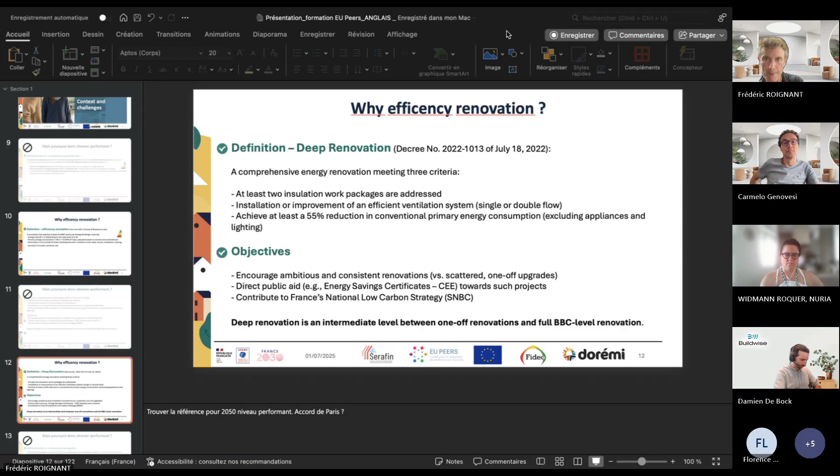Frédéric? Yes, just one question. We are still on slide number 2 on the screen. Is it normal? No. Is there any change now? No. Okay. Now it has changed. I try to share the document again with you. Now we are on slide number 12. I got a problem. Yes, number 12 is okay. I think you are not sharing the right window. Sorry. Is it better like this? We still see slide number 12. And now, do you see number 14? No? Okay, so the problem still remains. I think if you stay on the PowerPoint window, you might change the slide manually and we should follow it. Yeah, like this is better. This is number 12. And now this is number 14. Okay. Good. Thank you.

Thank you, everybody. So I was telling that there is a second definition, which I call deep renovation, which is a little bit different from the first one. Here you will see we just have two insulation works, whereas in the first one we have more. It's the question of ventilation system. Here you have the choice between single or double flow, and we have a criterion of improvement of the reduction rate for conventional primary energy, which is a little lower than the first definition objectives.

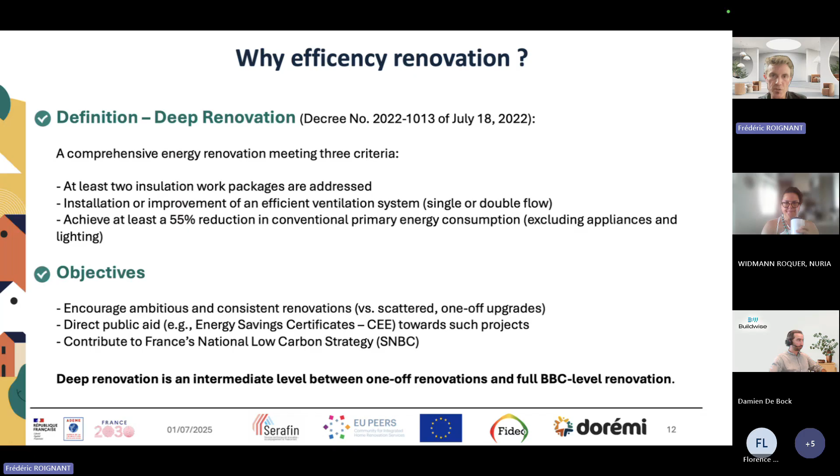Okay. So on slide 14, you have the definition of the one-off renovation, which is the largest gesture work done for the moment in France. For example, it's just changing windows or insulating or replacing a boiler, but without a global reflection on the work we have to do to reach very high efficiency.

For Doremi, we are not very pleased with this definition because we have a contribution with ADEME, a French institution, in 2020, which shows that 80% of one-off renovations are not capable of improving the DPE, which is the scale of evaluation, by more than one level, and only 5% reach the BBC level or equivalent.

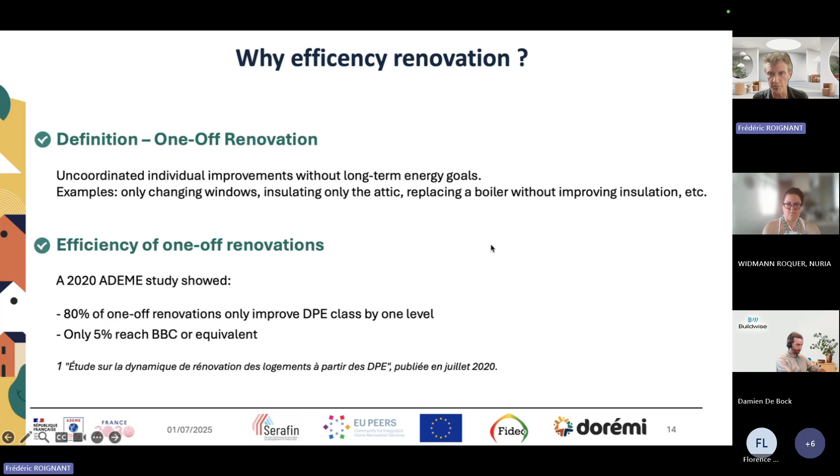Okay, so at the end of the day, we see that one-off renovation work is not the one which has to be continued or supported to reach the climate level in 2050.

Okay, so why do we talk about efficiency in renovation? As you can feel today, it is because we are facing global climate change. But more than that, we have seen that we will face social goals also. We have a big amount of people in energy poverty in France, and working to improve efficiency in renovation will create local and non-relocatable jobs here in France and in every country,

supporting territory development. Okay, so besides the climate goals, we also have social and economic goals, and surveys show that we can expect about 8 million energy... Sorry.

Okay, I'm lost in my slides. Sorry.

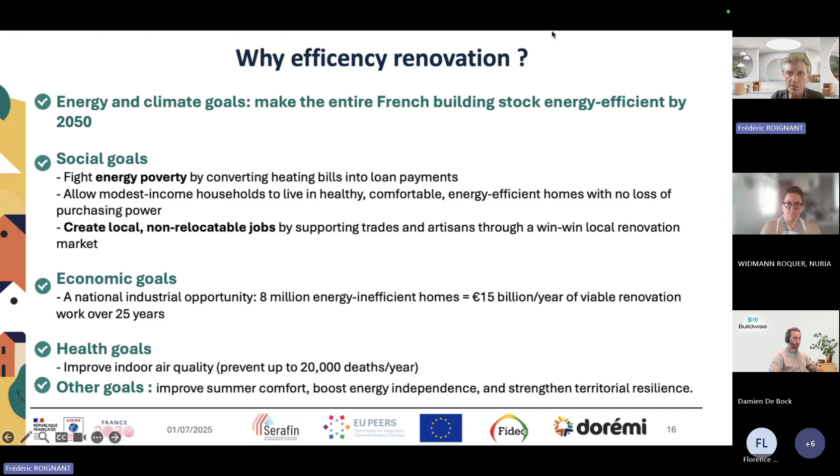Yes. Okay. The word is we have an opportunity for economic industrial development, and you've got figures for the 25 coming years. And also there is a point: health goals. Because we know that we've got poor air quality in homes today. Okay, so this is the major point because we are dealing with efficiency renovation today.

For Doremi, the word is we want efficiency renovation to be accessible for all people when it's well planned, optimized, and well managed. Okay, it is not just for people with good revenue. So we need to regard financial planning and project coordination to ensure that we will succeed in this work. So for us, efficiency in renovation is you get good health quality in the home, you have comfort, and you consume very little energy.

Okay, so now chapter 2. It's not sufficient just to talk about energy in a renovated home, but we want to be sure that the energy performance is real when the work is done. Okay, so we will see how we are organized in Doremi to achieve this goal.

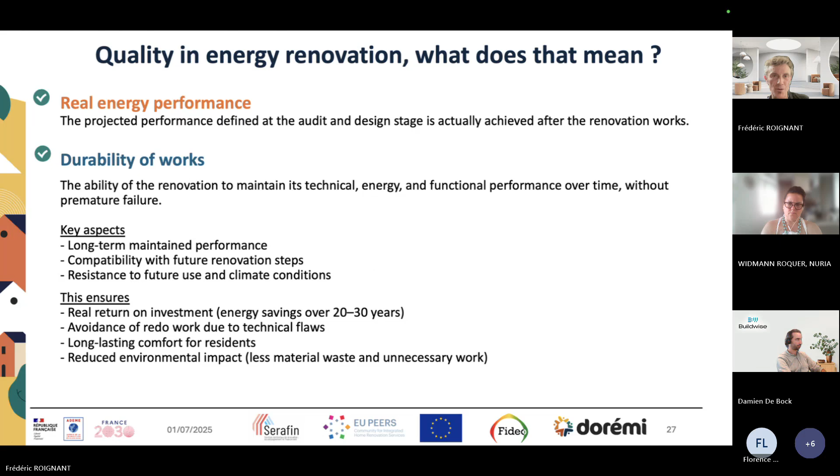Sorry, there is a title in French. This is what quality in renovation is. So for the user, it means first of all comfort and a healthy residence. We know that 30% of people talk about difficulties during cold winter to be okay in their home. And we see there's an increase, because in 2020 the figure was just 14%.

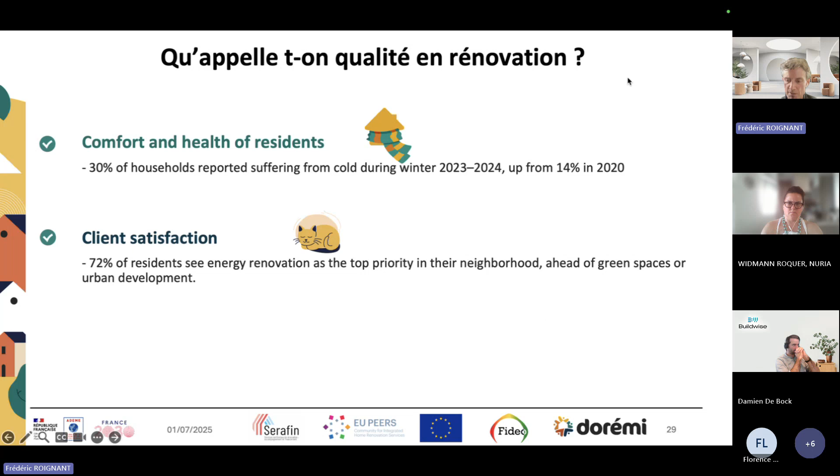Another point is satisfaction from the point of view of the user. For them, this is the first priority, coming largely before other aspects like green space or urban development. So this is a very important point. Next one.

So let me talk about DOREMI in a few words, for you to understand how we are organized. We are part of a larger group, the Negawatt group. We were born in 2017. We come from the Negawatt Institute, a kind of think tank thinking about transition from a global point of view for France, energy and environment, and changing society's way of thinking. DOREMI has been created to face the demand for renovation of essentially old houses. We are independent, but we are also funded by great companies like Schneider or Edilians.

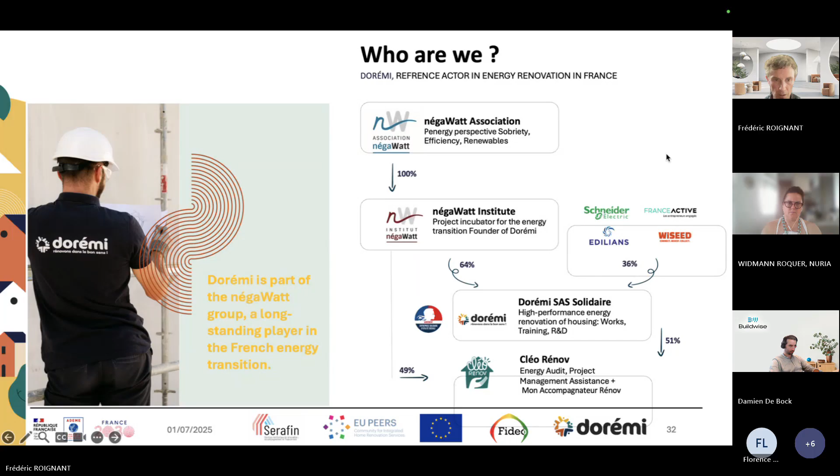Next. The strength of DOREMI is we are organized in 3 major parts. Here I am talking for DOREMI formation, which is training, one of the 3 pillars of our organization. We also have the lab, the people thinking about and dealing with research themes with partners, French and European. And we also have DOREMI work, the field way of doing high quality renovation.

So we are working all together day by day, and this is the strength, because the innovation put forward by the lab is trained to craftsman groups and finally leads to a good renovation project on the field. This framework is very particular, and I'm not sure there are lots of companies organized like this in France.

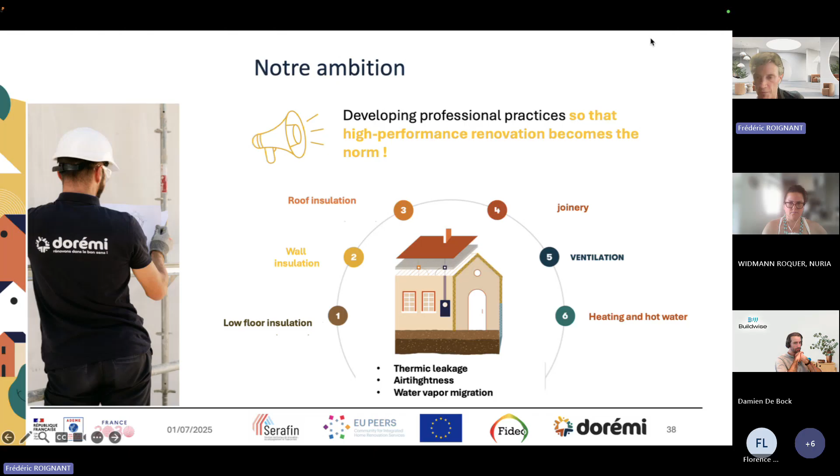Okay, and this is very specific because this way of thinking the renovation is not very shared by lots of people here in the field, in reality. Okay, so let's go deeper in how we are organized to do that. Let's talk about pillars of quality. It's like many proofs of quality. So let me explain one of them.

Based on this scheme, we can reach high performance energy renovation in 2 ways. The first one, and the major one up to this time, is the project in one step. Okay. It means we will find fundings, technical solutions, and without any blocking from households. Okay, these are the 3 conditions which make it possible to do high performance renovation in one step.

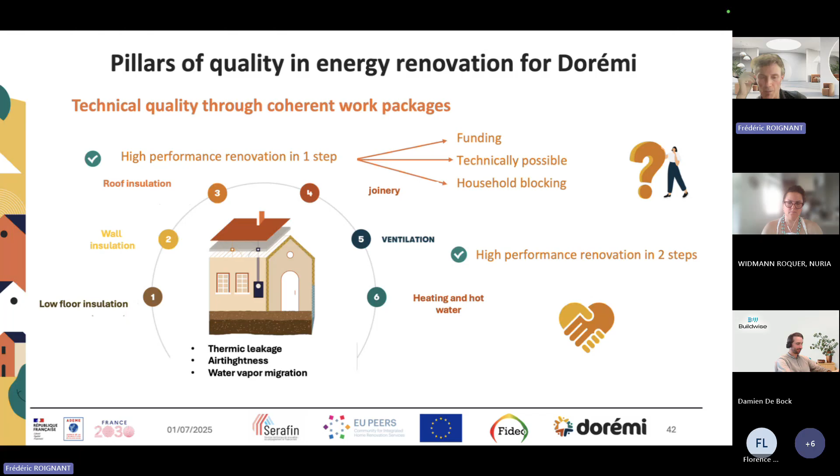Okay. There are some French inside. So I don't know why.

Another goal is to ensure our partners that Doremi is still engaged in high quality renovating and not just going to say, okay, it's not important, let's do 3 or more steps and we will see what's going on. No, it's not okay for us. So at the end this study showed that it's possible to do it in 2 steps. Okay.

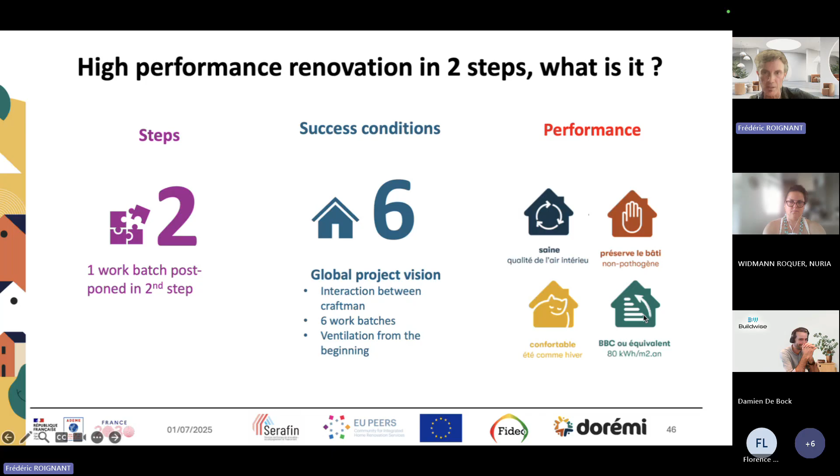So if we want to sum up the conditions to have performance in work in 2 steps, we will say that we have the 6-pack of work plus the interaction between craftsmen, which is very important to ensure quality. And we know that we have to treat the ventilation from the beginning because with its network, it's more difficult to do the work at the second step. And if we have these conditions, we know that we can reach the same performance as if we do the work in 1 step. Okay.

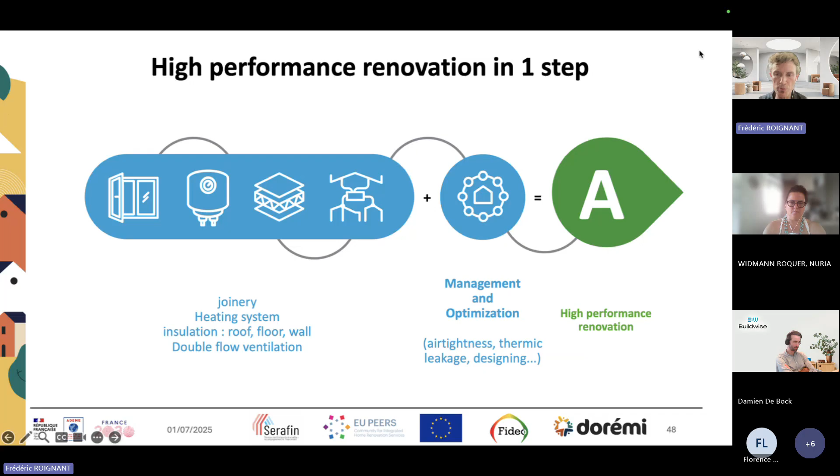So another scheme. So the conditions to get high renovation performance in 1 step are these ones. So this type of work: joinery, heating system, insulation, double flow, and 3 more things: air tightness, thermic leakage, and designing.

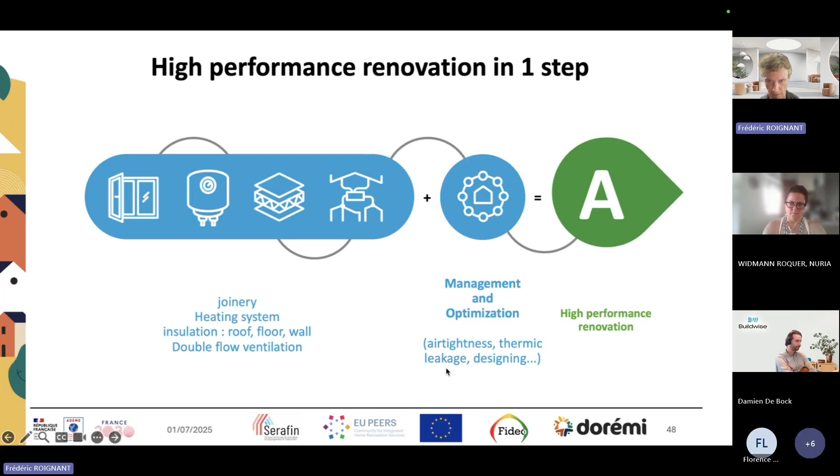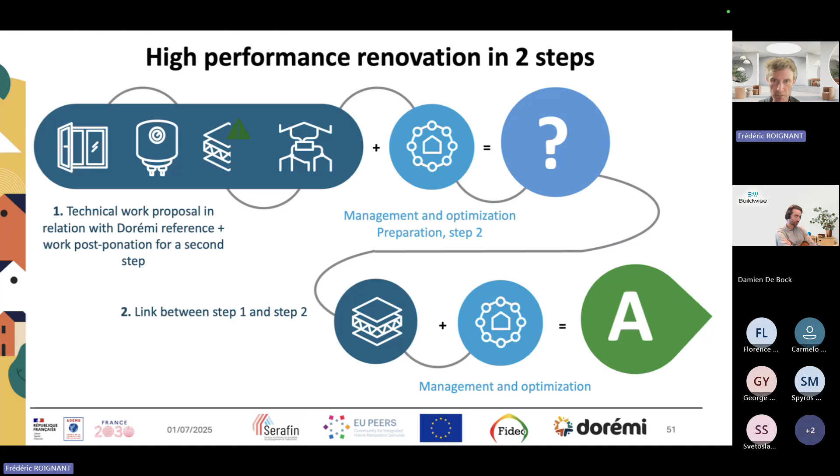And if we want to do the work in 2 steps, we'll go with some work. And after we have to optimize and make it possible to do the complementary job in step 2. But we have to deal with it and design it from the very beginning of the project. Okay. So it's more complicated, but it's possible to have the same result at the end. Okay.

Do you have any question at this stage? Do you need to make a little pause or something?

Okay, so if it's okay for everybody, let's go on with another point of quality for Doremi. The thing is, if we want to have quality, we have to have a look at the global landscape of performance actors. And to ensure we have good actors, we decided to train them from the beginning. So we designed a training program for enterprises, while generally it's more like craftsmen groups of 2 types of small enterprise. And the goals are to make them progress on professional practice and also create the conditions to work together and to be okay with the global methodology of Doremi.

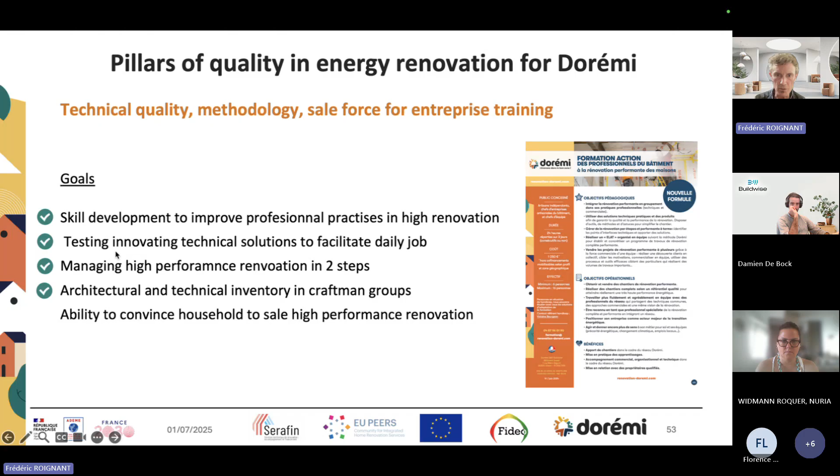Okay. So this is a very short program, just 3 days, like a more academic training program here in Valence or in regions. And after, there are some experts who are close to them for about 1 to 3 work projects on the field. And we have also the same kind of training program, but for experts who are going with them during the beginning of the collaboration with the craftsmen. We know experts, but they are also trainers.

So this one is a 4-week program. We talk about training, teaching postures, how they have to face the craftsmen, the household, and we talk about the way of teaching and the way of managing a group of craftsmen, and sometimes it's not very easy. Okay, and obviously we talk also about technical expertise, sales, and organization.

Okay, so this is another point. We talk about training for enterprise. For teacher, they go with craftsmen, but we also have an organization for household because they want to have someone to talk with during the project from the beginning to the end. So we have a commercial offer which takes them from the very beginning, the first contact by phone, to the reception of work, usually about 10 months or more of collaboration.

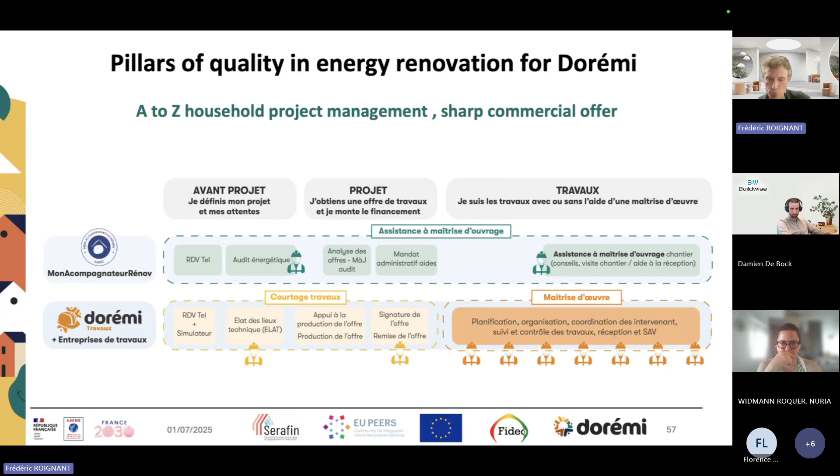Then after, the trainer goes with the craftsman group to design a technical and financial estimation for the work. Then after that, once the project is signed, the craftsman group makes the work together, but they are guided by the trainer and the expert from Dorémi.

Before the end of the work, we have a very important stage, which we call the N50 test. It is the way to show that the airtightness is good or not, and it is the time we discuss if we need complementary work to reach the expected quality. Finally, the last step is the reception of the work by the whole craftsman group and the trainer.

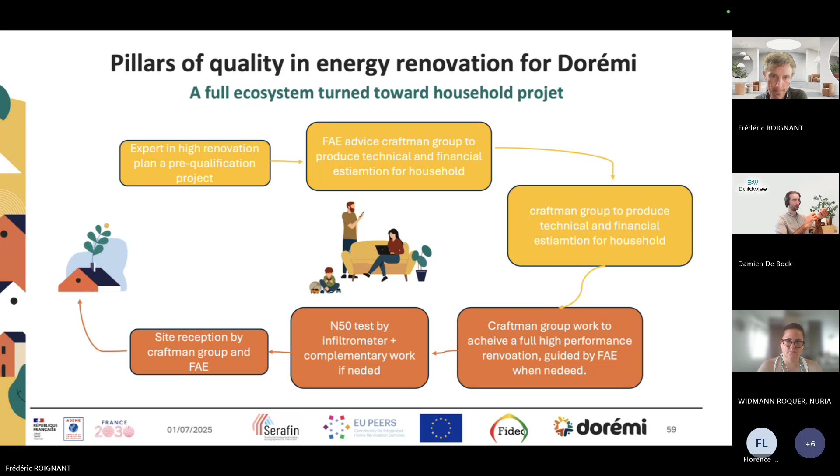Okay, so this slide is just to show you the major steps for the renovation project from the point of view of the user, the household. More or less it has the same meaning as the coming slide, so I'm going to be very fast on this one.

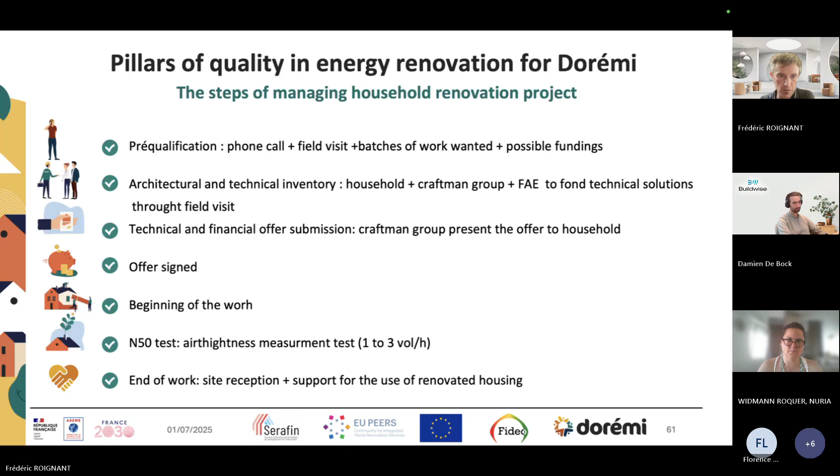And now I'm going to present another tool at the service of quality for the benefit of the household. It is the internal reference grid, we call it référentiel Dorémi, for high quality performance. So this is the first page of this document, and what is inside?

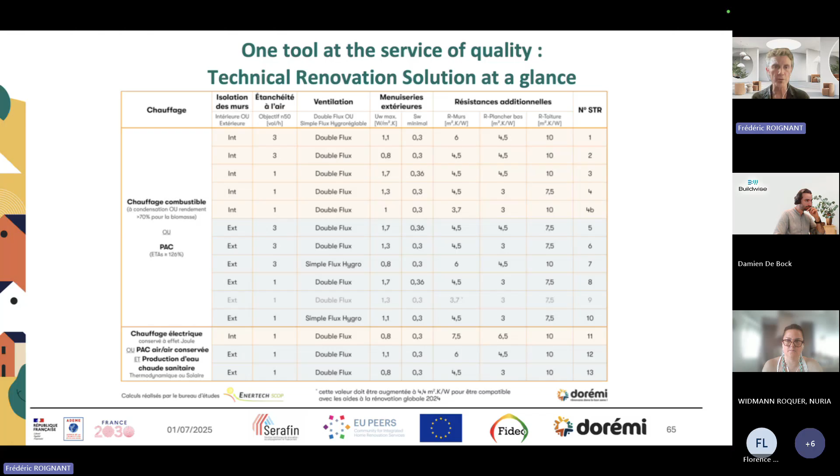Then when you go along, you just have to follow the line, and after you reach a number of solutions, which is a pre-thought way of designing the project. So we don't need to do any long thermic study for this particular project. We know that in this kind of condition, we can reach a BBC level, a low consumption for houses, just by following this grid, more or less. So it's a way to stay simple in the way of engaging work, and this is also very useful to talk with the household.

Okay, so another major point for me is that quality is not just designed on paper, but the quality is made also because we are present at each stage of the project. So these stages are: before the craftsman group makes the proposal to the household, we have control. Before the engagement of the household, we have a control. During the work, we have control, and one of them is the N50 airtightness test. And we also have control many times during the work.

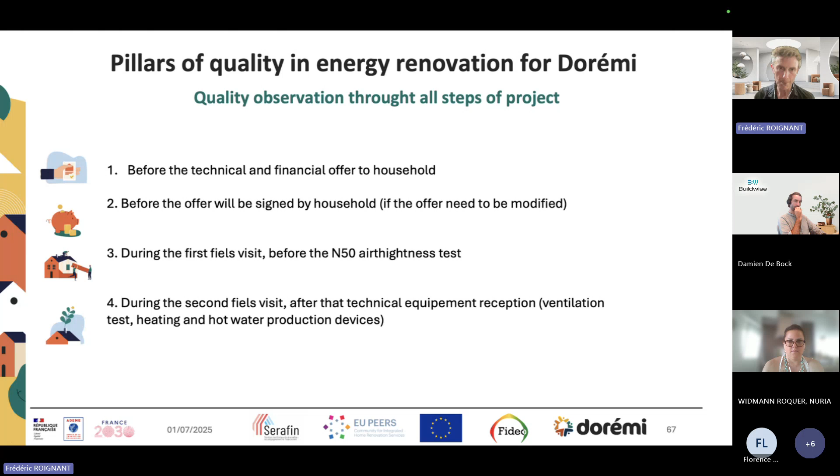And just to show you a tool we use to make the control, we developed this grid directly linked with the référentiel Dorémi for high performance. And the experts follow this grid at each step of the control, and they make control iteratively, times to times. So they have the capability, the ability to show the progress on the work of the craftsmen.

We also got an intern software to follow up the project. As you know, we are spread across 5 regions in France, so we have numerous projects at the same time. We need to be very organized to know what's happening, who the projects are, and where they are, to make adjustments if needed. This software, called l'Appli, is just an internal software, but I want to show you how we are organized.

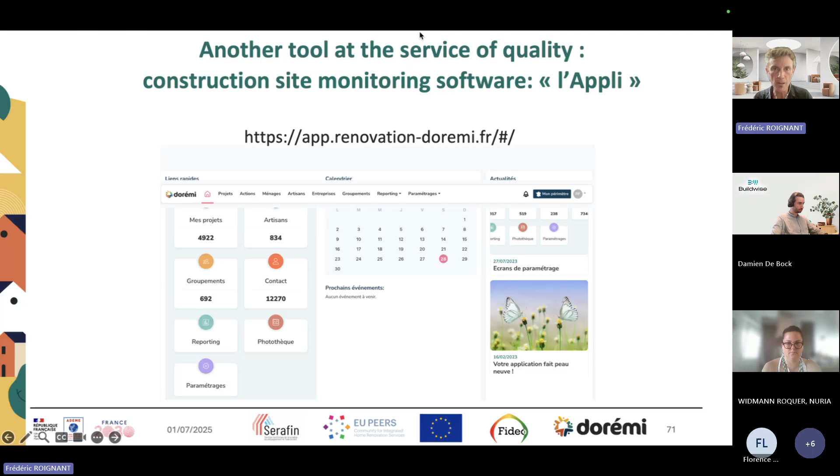Okay, I have to just, sorry. I'm going to make a jump to this software if it's possible, and I'll share it with you just after. Okay, where is it? Tick-tack, tick-tack, here. Okay, just a few moments please. Okay, so it doesn't work. Okay, no.

Okay, here we are. Let's try, I'm not very good with sharing documents. Do we see something different than before? Yes, no? Yes, it's perfect.

Okay, thank you. So here you've got the projects. I'm not going into detail, just a quick overview of the software. This is the list of projects we are dealing with at the moment. I'm choosing this one, so you can see an organization.

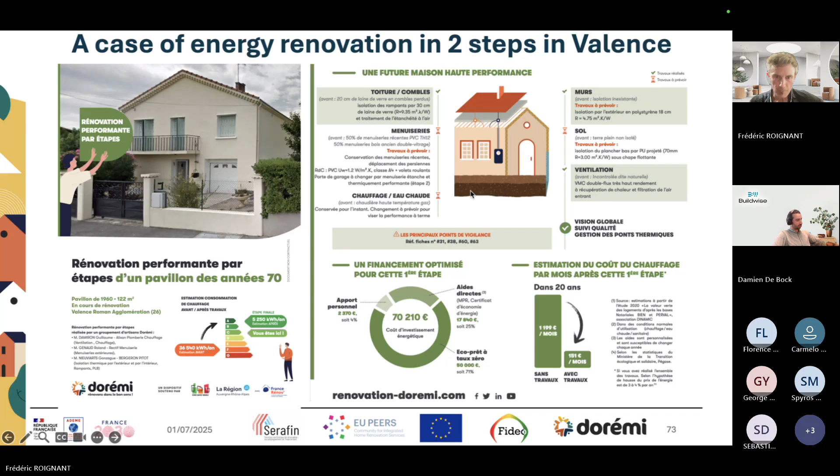And here you've got the detail of the type of work designed - the first step in black, and the second step in red. So this is a case where it was not possible to do the renovation work in one step.

This is a document that is discussed with the household, and if needed, there are references here in red and black to a technical guide they can refer to if they need to go deeper in understanding the technical work they are going to have.

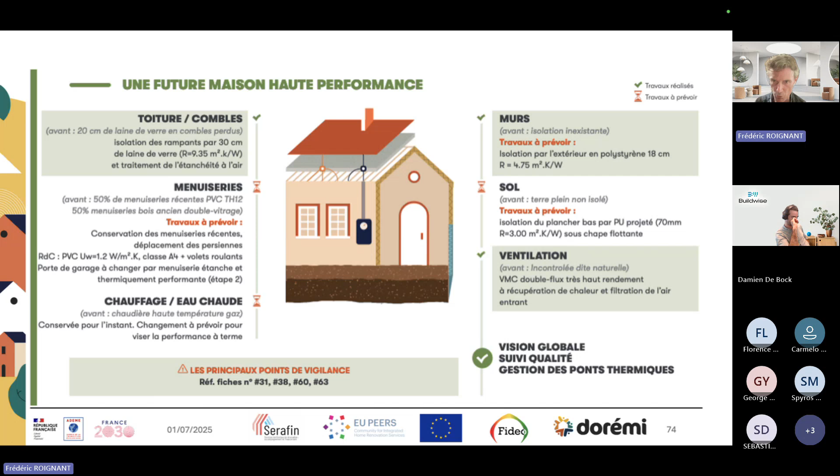For example, these guidelines are those ones. They are free on the website, you can download them for free. There's a version for the household, and there's a version for professionals.

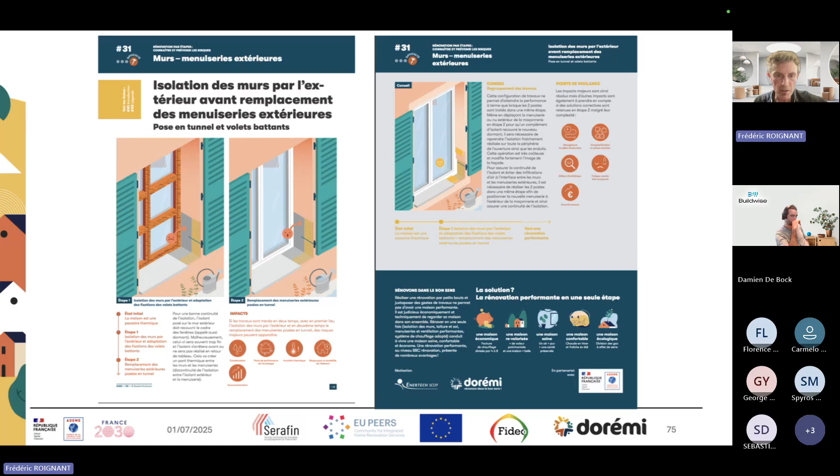This one is for joinery, this one is for insulation in one typical case, at this point between wall and floor. You've got also another type, and you can search by a number that links the website guideline to the document I showed you before.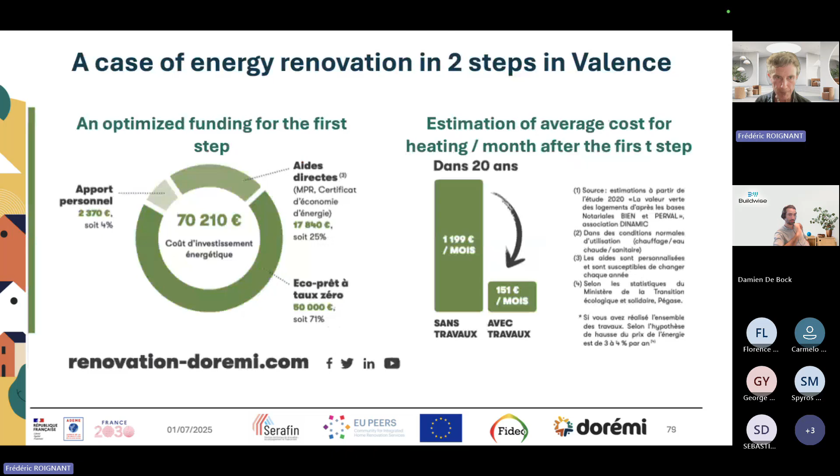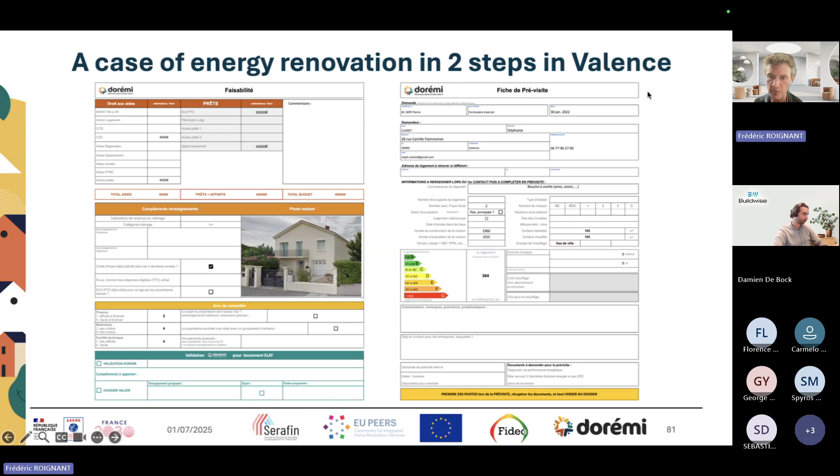This is the same but bigger. This is just to show you we have an intermediate grid to have a view at the beginning of the project of what is designed. This is the first step to share with the household what is designed for their house - a way to communicate with them and get them moving through the project.

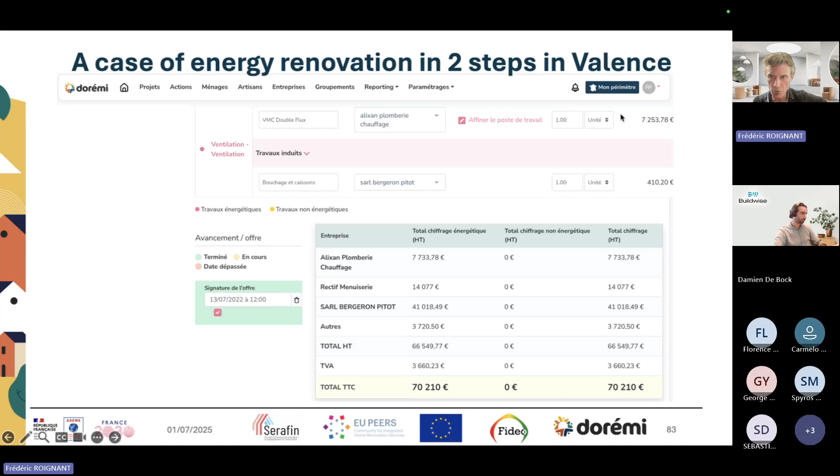Okay, so just figures coming from the software, the Lapli I showed you before. I'm going to go fast on this, since it's the same.

Now I can deliver some results from the global way of doing work in DoRéMi. We got an internal survey to stay close to the market, covering the years 2022 to 2024. The first figure is that renovation in one step still remains largely more common compared to two-step renovation work - it's like 75% for the first one. The average surface of houses we are working with is 120 square meters.

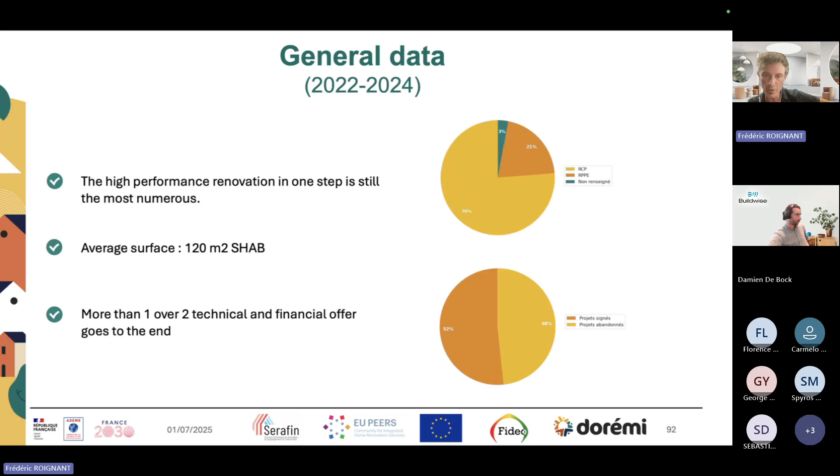We got a good transformation between the step of technical and financial proposal to the realization of work. This is a very important figure for craftsmen because they are more or less sure to have the work when they go with DoRéMi.

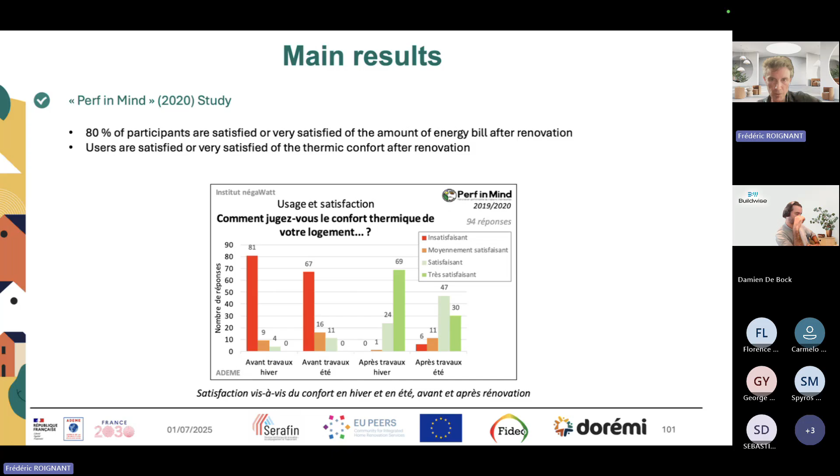So globally, these results show a global approach of satisfaction for households in this campaign. About 40% are very satisfied with the quality of work during the campaign.

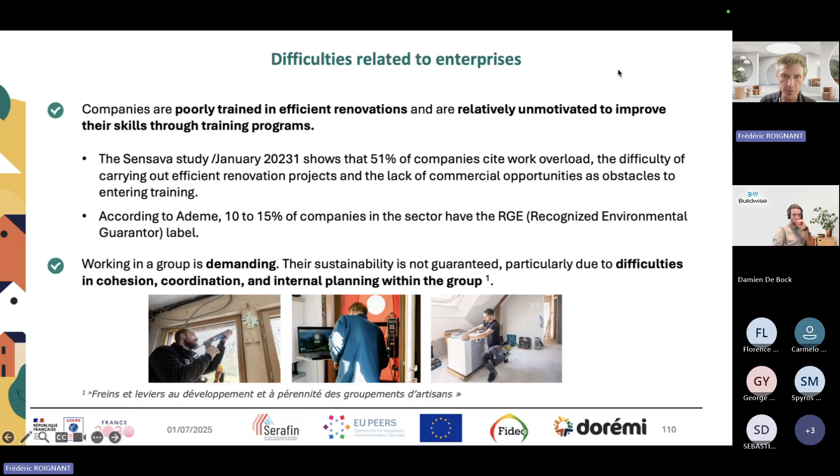Okay, so what's going to be in the future? Prospects for development. We are working on rewriting our renovation toolkit. The goal is to make it more friendly to use on the field. So this is a guideline to be used by craftsmen on the field. So this is an internal process of DoRéMi, just to make the use easy for people on the work.

Okay, for training, we want to develop more operational training on the field because they don't want to leave their tools. They want to stay focused on the field work. So we have to develop this kind of training. We can also push the diffusion of return of experience, just to deliver a very deep message to the craftsmen. And also we can work on the recognition of quality as a label, like a DoRéMi label, just to encourage and make visible the quality developed on our projects.

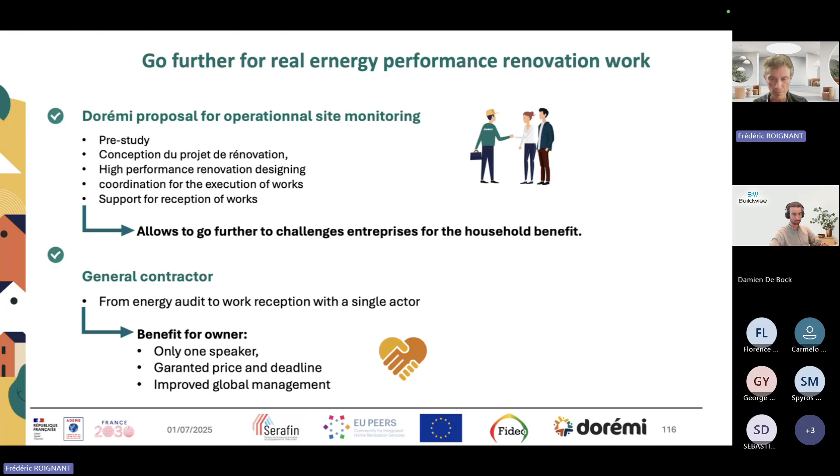And also, we have experience concerning professional skill development, because we train more than 1,000 people a year. More than that, we have an integrated approach, centered on the user, with a lab research pool, with the changing way of thinking with Institut Negawatt, with Cleo Renov, which is the structure to help fund the projects, and with work dedicated to quality observation.